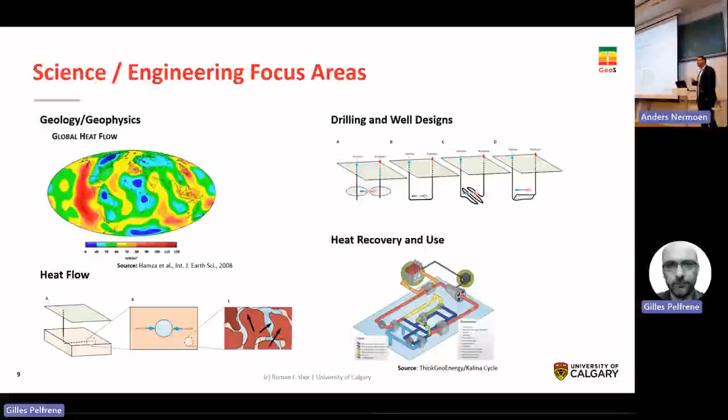Then on top of that, how do you enable these systems? So utility scale, microgrid type scale, how do you empower those local communities? Geothermal is one of the first energy sources where it's built in a community and then directly used by the community. Almost all other energy systems, that energy is exported elsewhere and then you buy it back from some other utility. Geothermal is one of the first ones where you can use it directly.

Small scale solar is the other exception. And then how do you educate the communities to de-risk those projects? And then how do you work with remote and indigenous communities as well?

A big challenge is how do you fund this type of research? It's providing funding to do this community engagement. You would think it would be easy. Companies don't really care. They want the technical solution, not the community solution. So what we're trying to do is pull out funding specifically for that to start looking at this.

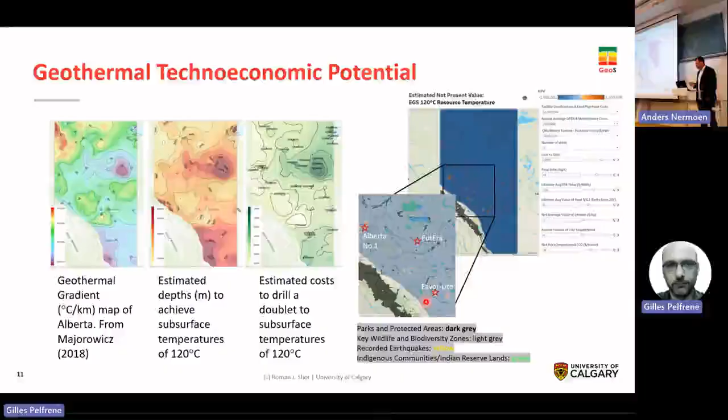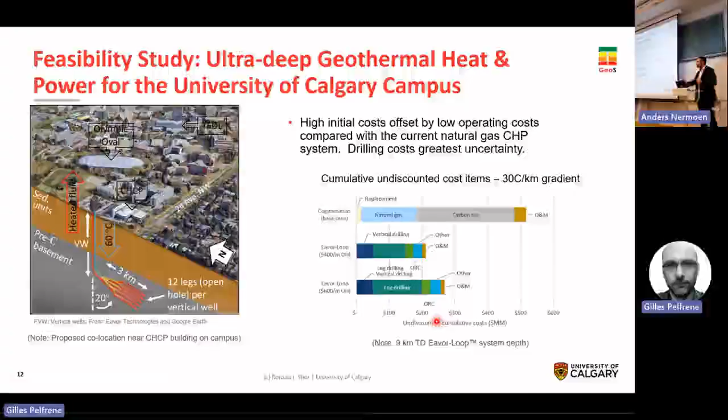If you start looking at the system lifetime costs, these systems do become feasible. The problem is you're paying 500 million over 30 years versus paying 200 or 300 million today. So how do you get these things financially viable?

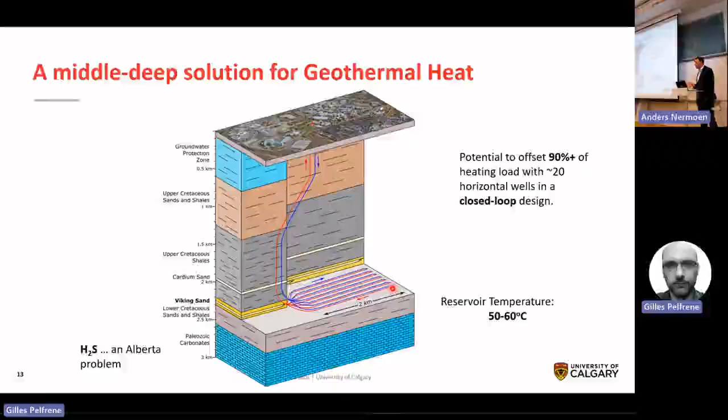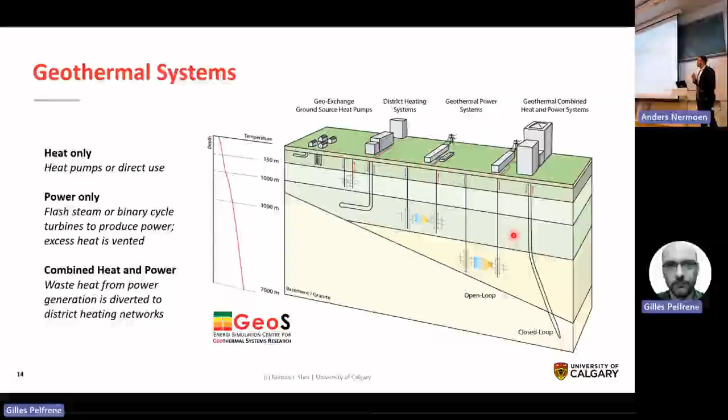So for all of these, what's common? There's a red line going downward in every single one of the systems - drilling needs to be addressed, and economics of drilling have to be addressed as well.

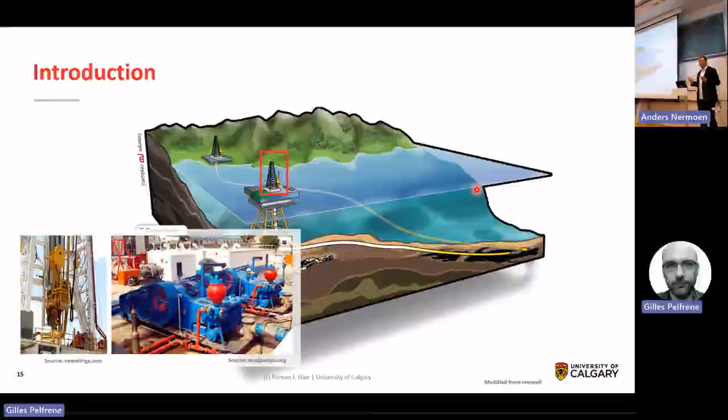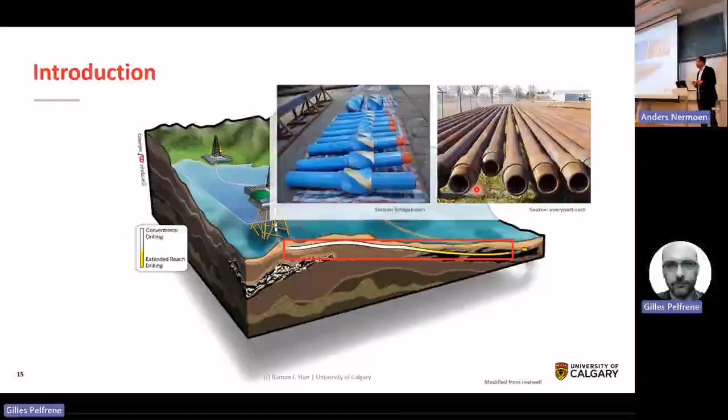So when we're drilling, here's an old picture I have. What do we have? We have some rigs at the surface - those rigs have a little bit of power, they rotate something, they flow stuff. Those are the things you can control at surface. All this energy goes through a little piece of steel pipe that goes all the way from the rig down to your drill bit. If you're drilling 150 meters, it's a pretty short drill string. If you're drilling 7 kilometers, that's a pretty long drill string - that's from here to, let's say, the airport. When you have a piece of steel that long, it becomes a very interesting dynamic system. At the very bottom, you have this little drill bit that's taking all this energy, or whatever energy has made it there, and is making hole with it.

So when we look at these systems, what do we have? We know what's happening at the surface - we know the energy we're putting in, the rotation rates, hook loads, things like that. We want to control what's down at the bottom, and down at the bottom we might be lucky and have some sensors that tell you orientation, vibration, rotation rate, etc. But the problem is, how do we get this data up to here?

Currently, mud pulse telemetry gives you 1 to maybe 10 bits per second at a latency of 1 to 20 seconds. So it will take you approximately 30 seconds to get a 64-bit number to surface. So that is very, very low rate.

The current bit rate to Mars is approaching a megabit. So we have faster data rates to Mars now than we have to a couple kilometers underground. So we have to deal with this very low data rate.

We can get wired drill pipe, and from what I hear, the Norwegians love wired drill pipe. However, it's pricey, so I can't afford it. So you can get some real-time data, but otherwise you're left with this piece of steel pipe and some stuff going on at the bottom.

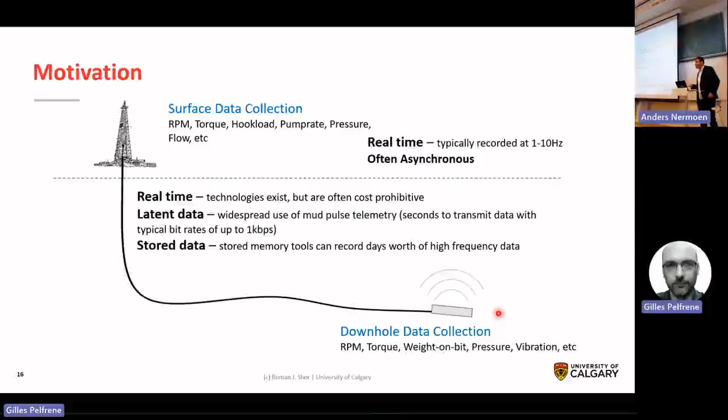We need to understand how energy is transferred from the top to the bottom to try and create what, in common words now, a digital twin. So a way to estimate what's happening down below in real time, so we can then optimize what's happening in real time. And then why do we want to do this?

Is because we want performance drilling. We want to drill as quickly as possible.

One way around this is this idea of mechanical specific energy, which is the amount of energy you're putting into the system versus how much, let's say, rock removal you're getting back out. This mechanical specific energy should be approximately the same as the rock strength. You should put as much energy to destroy the rock as the rock is strong.

If you're putting in more, that means you're inefficient. If you're putting in less and the rock is still failing, cool. That means the rock is either really weak or something else weird is going on. So both of those are an option.

So this is a very simplified view of mechanical specific energy. Your inputs, your RPM, so your rotation rates, your torques, your axial loads, etc. And then you have this bit efficiency times your rock strength.

However, the problem with this is we are not accounting for a lot of what else is going on in the system. So if your well is snaky, so it's not vertical, but let's say it's going off on a tangent, we don't have the drill string dynamics in the system. We don't have torque and drag. We don't have hydraulics. We don't have thermal effects. We don't have pressure effects, or let's say variations in that pressure.

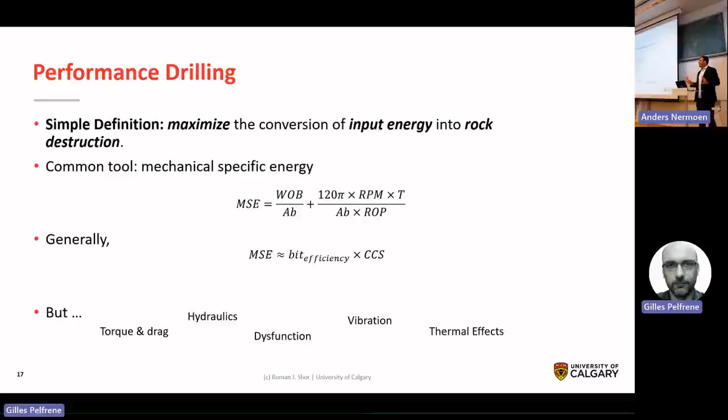So how do we account for all of this, all in real time, in order to make this energy input be as small as possible, or vice versa, we want this ROP, so our speed of drilling, to be as fast as possible. So now, I'm working very closely with Eavor Technologies on their deep closed loop systems. There's an NDA around that.

So they have drilled a couple wells, and they have a couple German wells coming along. I will talk about Utah Forge, which was worked on by people I know at Texas A&M, which is a good analog for what's happening with Eavor, and a lot of the performance has been matched by Eavor. That is all I'm allowed to say about the Eavor projects without you signing an NDA and giving me your life. So from now on, it's just Utah Forge and what was achieved there.

So Utah Forge, for those of you who are not aware, is a project in Utah where they are doing deep drilling through granite in order to test out EGS. So EGS, enhanced geothermal systems, drilling through granite and then trying to frack the granite, and then doing open loop flow through that. The nice thing is it is granite, it is hot, and it is deep. So what can we learn from that?

So 2 papers, which is all the following figures that come from them. Again, this has been matched or exceeded in certain cases.

So, quick history lesson on how drilling at Forge started. So their first well, where they started drilling, so the top of granite is right about here. Sedimentary drilling quite fast, and then a very slow drilling once you got to that granite section.

So the first well was drilled at around 2 to 4 meters per hour. Traditional geothermal technology, tricone bits, heavy viscous muds, lots of LCM. You don't want to lose any fluid. You really want to safe operation. 2 to 4 meters per hour.

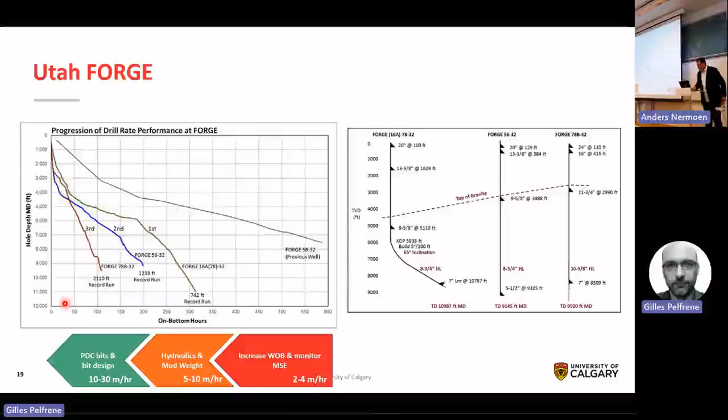So let me go on time. Again, a lot of plots on here about looking at performance, declines, etc. I'm just going to highlight 2 or 3 of these.

So the first one is what typically happens when you're drilling through granite. You start drilling at a very high ROP, very high speed of drilling, and then if you continue to apply constant weight on bit, a constant force to the bit, you have this exponential decline in ROP. Your sharp bit gets dull, and then slowly starts to fall apart.

If you instead apply an ROP limiter, so you drill at a certain maximum speed, you slowly increase your weight on bit, and then once you hit your weight on bit limit, then your ROP starts to drop. So what you're trying to do now, if you're looking at this from an optimization point of view, you want to increase this area under the ROP curve, because that is your hole drilled. You want to maximize that.

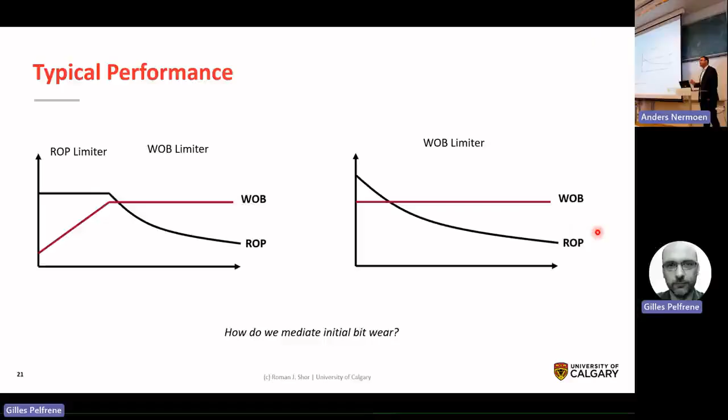So which of these two ways is the best way? That's still a question. So this is where we start looking at optimization of what do we want to do with our drilling parameters to have our maximum sustained ROP, or the maximum ROP that is sustained for a longer period of time. What's the effect of weight on bit?

The weight on bit pushes each individual cutter into the rock. So your rock removal is now a function of how much the bit can dig into the rock itself. The more it can dig in, the more rock it removes, at least until the bit stalls. So there's a balance now between enough effort, but not too much effort, and you want the bit to stay sharp.

How many of you have ever tried drilling into your granite countertop at home? How long did your drill bit last there? Not very long - it's a very difficult abrasive rock.

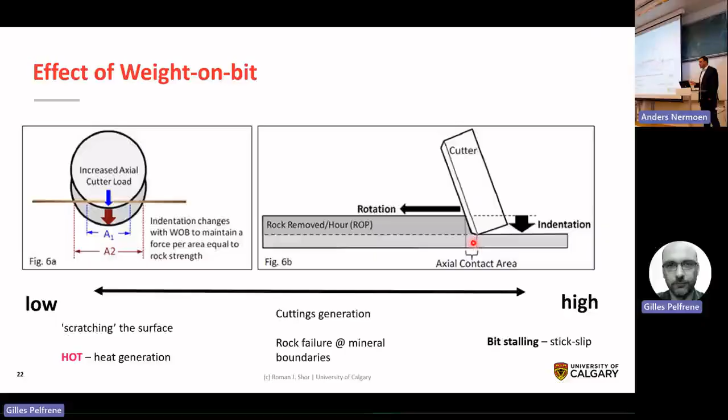So now what we start thinking about is how do we design these cutters in such a way that they can take huge amounts of abuse from drilling into granite, and then last for a long period of time. All right, I'm going to skip these three and go to bit wear - how do these drill bits wear over time? Here's a good example of evolution.

You start with just a little bit of wear, and then as the bit becomes more and more worn, this diamond face that you have starts to fall apart, and then the carbide that's behind it also starts to wear. So you have this slow decline.

If you think back to that curve I showed, this is you slowly increasing weight to maintain ROP. And then this right here is now when the drill bit starts to become irreparably damaged. The goal is you want to push this drill bit for as long as possible so that you get drill bits that come out with damage to cutters, but not to the actual drill bit body.

These things are replaceable. You just pop them out, put new ones in, you go back in hole. If you destroy the actual matrix of the drill bit, that costs you money, because then you went from renting a drill bit to buying a drill bit.

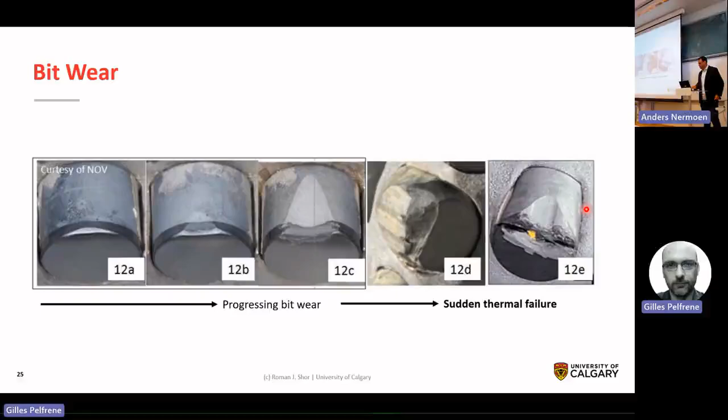So now you have another optimization problem of how much can you force the drill bit to drill before it completely falls apart. And if your rock is very interesting, you can have a lot of heterogeneity, like hard versus soft rock. That can cause fracturing within the bit matrix itself. If you're going from a soft to a hard lamination, you again have a stress contrast about what gets damaged and wear.

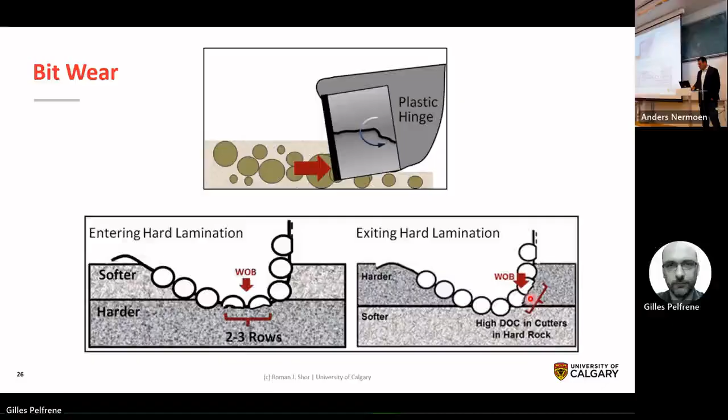The reason why this is important: in sedimentary rock, if you have a borehole pattern, sedimentary rock is soft, your drill string will wear it out. It will just become smooth. Granite is not soft. Granite will stay ledgy.

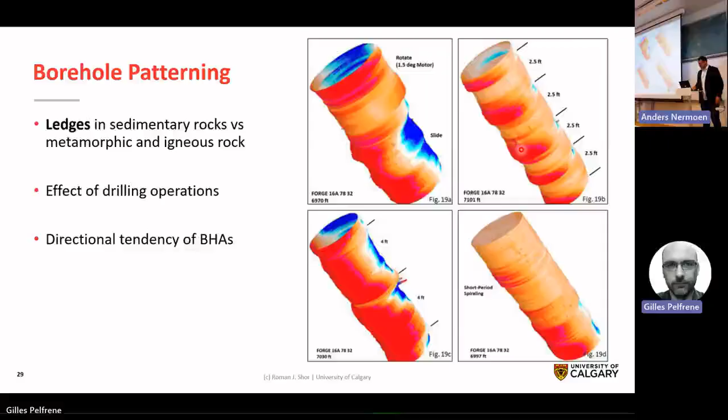Then borehole stability, that also becomes a problem. I'm going to skip that one.

So what is needed for geothermal energy to succeed? You need the reservoir, so you need to be able to characterize it, understand what the temperature and flow properties are. You need to have a reservoir management plan. That's the key one because your wells last for 50 years. How do you manage the temperature in your reservoir?

Oil and gas wells last for what, a year before payoff? Two years? You don't really care after that. You extract additional value, but don't really care because you've already gotten your payback out. For geothermal, you need 50 years of operations.

You need drilling technologies, so that's both efficiency as ROP, but also bit life. You need your production equipment, so it's a scaling and longevity of equipment. You don't want to be replacing things every year. And then you want better energy conversions.

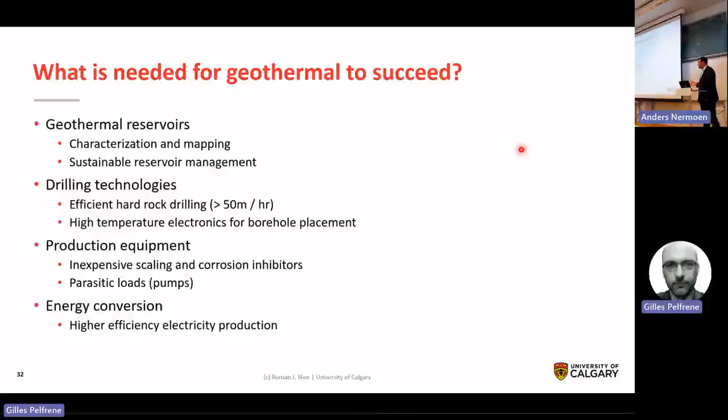And finally, the challenge. So the big challenge for geothermal: imagine you want 1 gigawatt of geothermal power. That is nice because geothermal power is 90% capacity factor. It'll produce all year. That's the same thing as 3 to 4 gigawatts of solar or wind, because solar and wind are about 30% capacity factor.

So you need battery or some other storage to store that energy to give you a base load of 1 gigawatt. And it can displace quite a lot of natural gas if you're replacing natural gas. Cool. Those are the pluses.

The problem, though, is you need, if you have 100 degrees C delta T, so you produce at 200 degrees C, inject at 100 degrees C, you need 8,600 tons of water in order to produce that 1 gigawatt hour. If you only have a 1 degree delta T, you need almost 1 million tons. So this right here, 8,600 tons of water is 72,000 barrels per hour, or 1.7 million barrels per day of fluid production. That is almost 2 times the North Sea oil production.

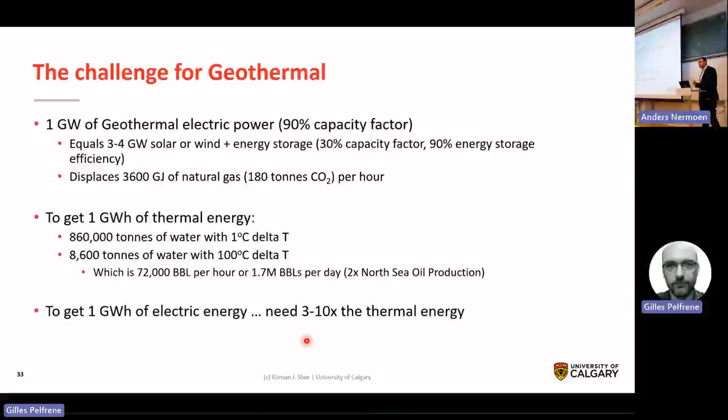Not just oil, not total fluids, because there's also a lot of water in the North Sea. And this is just for thermal energy. If you want electricity, you need 3 to 10 times that. So 1 gigawatt of power is equal to 3 to 10, or 6 to 20 times, North Sea fluid production. So that right there is the challenge: how do you produce all that fluid and produce it cheaply?

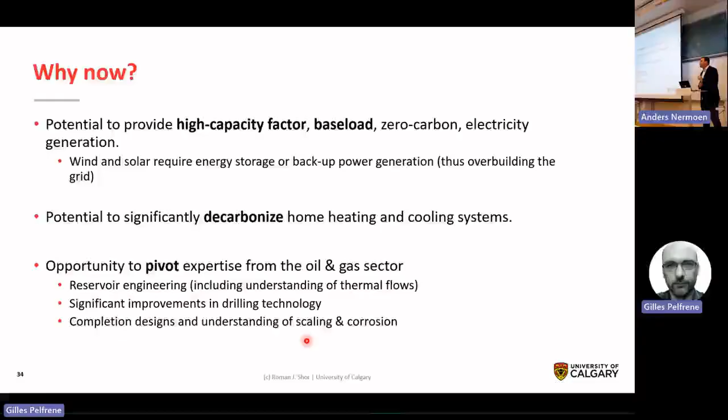So why do we care about this now? It's high capacity factor, base load, blah blah blah, we know this. And the big plus is we can pivot everything we know from oil and gas to this field and move on from there.

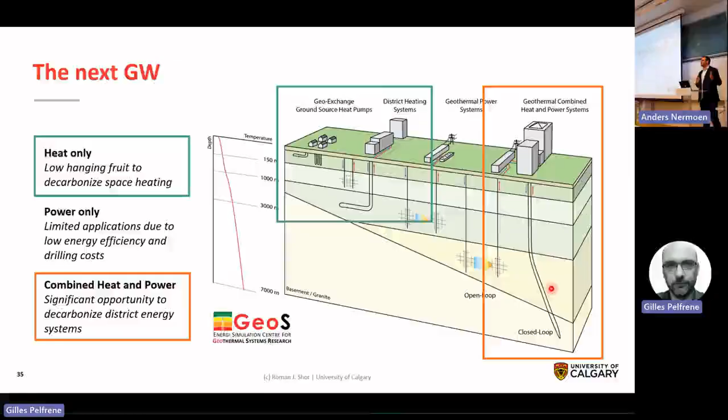So where's that next gigawatt coming from? I personally think it's heat. We've already had quite a few conversations about heat during this conference, and also that deeper combined approach, where you're doing heat plus something else. Just geothermal for power has very limited application. You need that additional use for the heat, because the cooling tower is the worst use of heat on the planet. Well, how else can we use that heat?